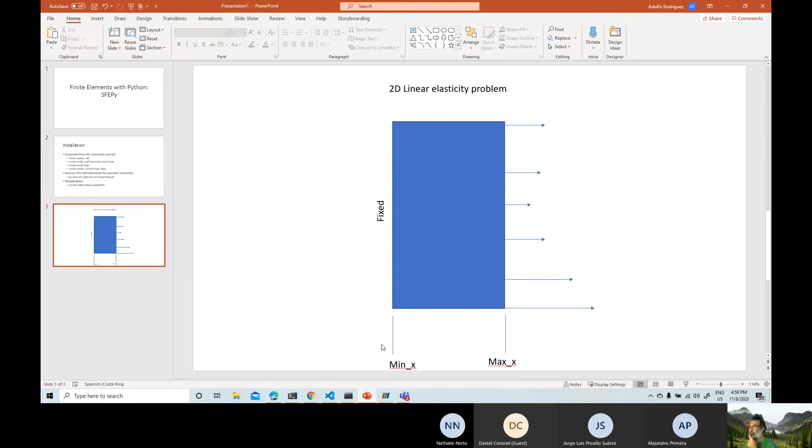They have meshing capabilities as well. So the bottom line here, and what I want to let you know, is that doing this kind of calculations, the software that you need is typically very expensive, and one of the reasons probably we haven't seen too much growth in many of these applications in petroleum is because the software is expensive and not very available to many people. But now we have the ability to use this, and this is just one of them. This is my favorite one, let's say.

But there are many other packages for finite elements in Python, which are open source. I forgot what I was doing. Examples. In the comments, I sent you a gallery.

Oh, okay. That has more visuals. At the top in the messages, just next to the participants icon. No, you were there. Okay. Just at the top of the icons. Go to the top of the icons with the microphone. Then next to the, yes, over there. Okay. Yeah. Well. Yeah.

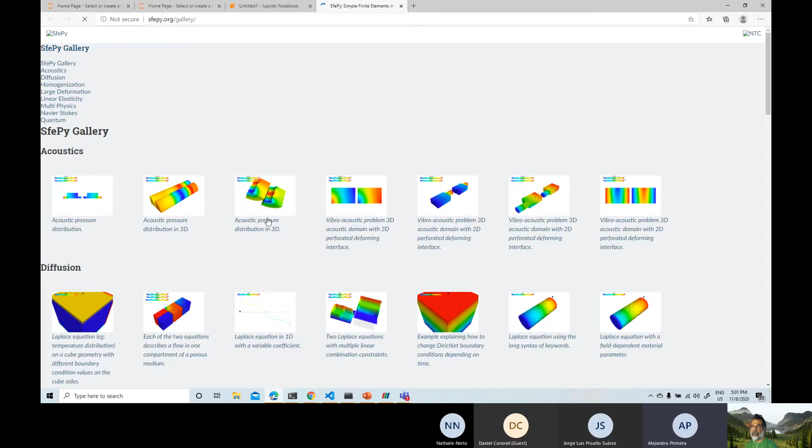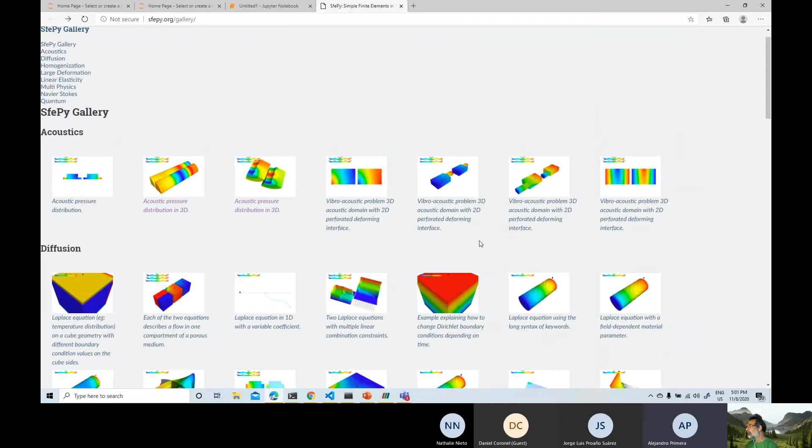So let me see if there is Navier-Stokes here. Well, for example, this kind of problem can be used for wellbore stability, or acoustics, so yeah. So it will be interesting if you have ideas. I have my own applications that I have worked on in the past, but certainly it would be interesting to see if any of you have an interesting application that we can work on.

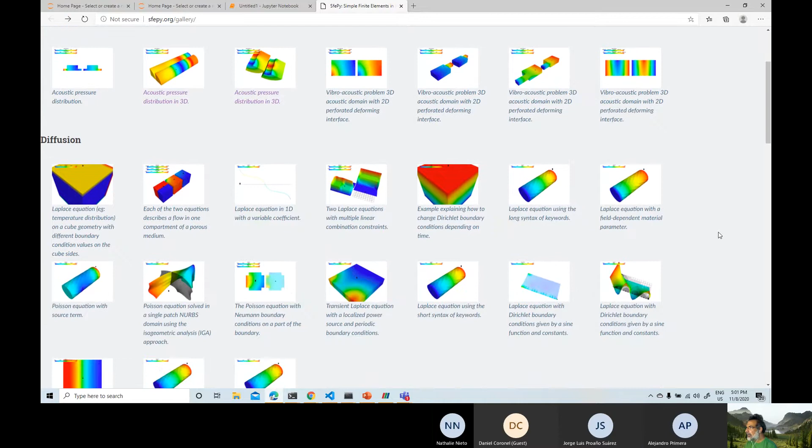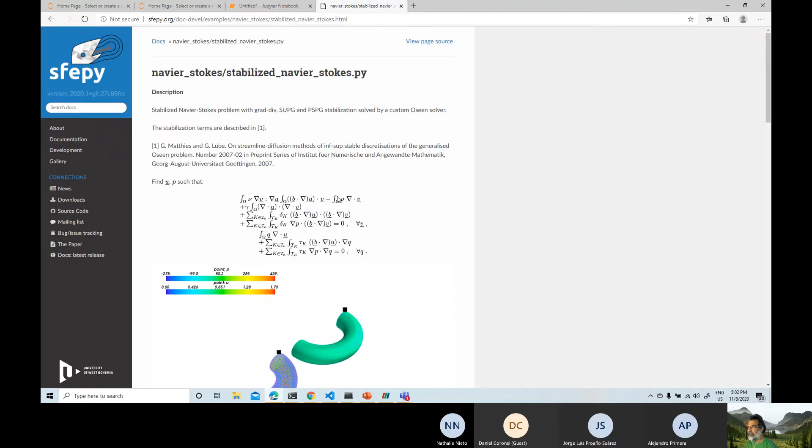Yeah, I don't see the Navier-Stokes here. Oh, there's more. Oh, Navier-Stokes. Okay, here it is. Well, this is interesting. Oh, well, there's something else. You can use this package as a black box solver. And then you can specify things in different ways. So I don't like this way.

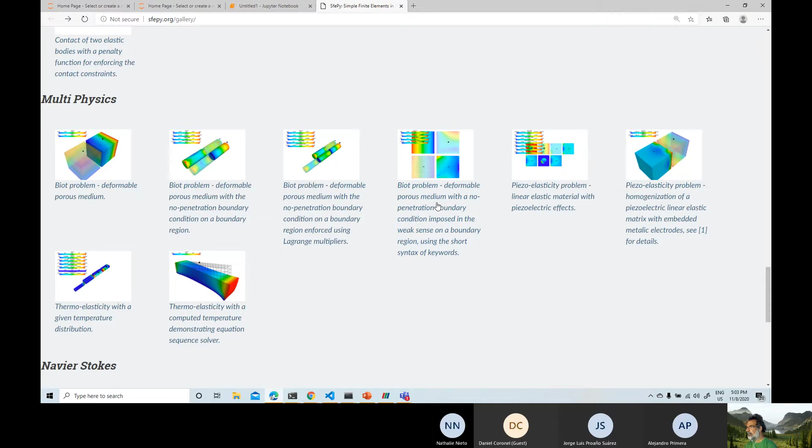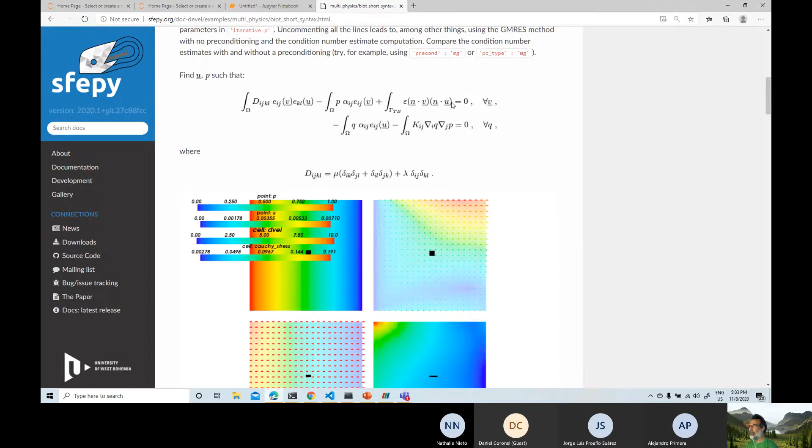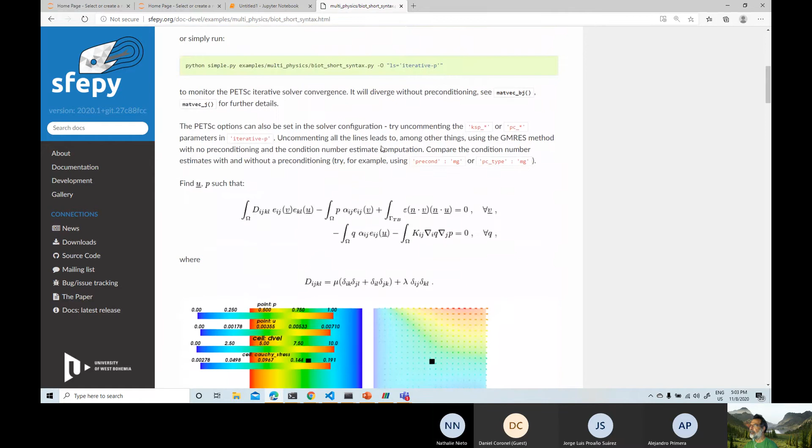Well, look at this. This is a Biot problem. So this is a coupled flow mechanics problem. I have an issue with these equations. I don't think they are correct, but I used this example for one of my papers. So this is what you can do. You have an idea for a paper. You can come here and see what kind of problems you are trying to solve, and start from there. So much better than starting from scratch. Right? Starting from scratch is going to take you years to solve one of these problems, and it's going to be just that problem.

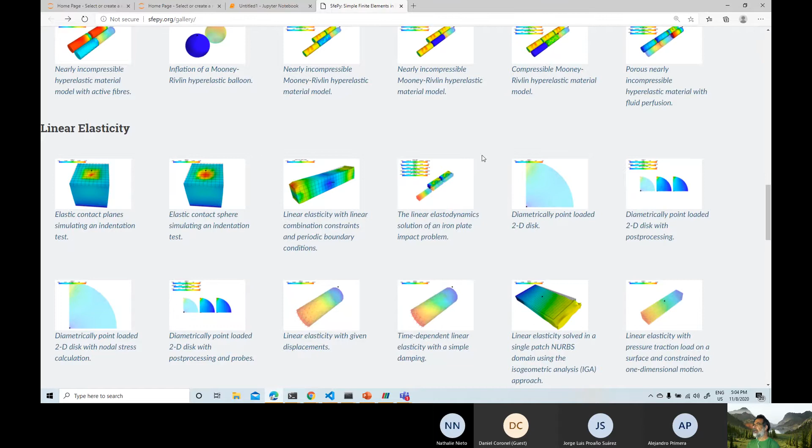So yeah, well, that's what I have today. So hopefully we can build from this and start applying it to interesting problems in the next sessions. Do you have any other question? I guess not. Well, to me, it was very good. It was enlightening. So thank you.

Okay. Welcome. I mean, I know that looking at something new may be challenging, but we have to start somewhere. Right? So what I'm showing you is that solving the problems that you saw in the gallery or the one I showed would be very, very difficult if you had to write the code yourself. So there are no limits here.

So when you open the VTK file in ParaView, where did you export the file? Yeah. I didn't quite get it. Let me see. I'm not seeing my notebook.

Did I close a notebook? In the second. Yeah. Let me open it again. I don't know why I don't see it. This is my issue with the notebooks, I always get lost with them. It's not there. It's not here. I may have closed it. Maximize. Just maximize. Right click and maximize the one that you want.

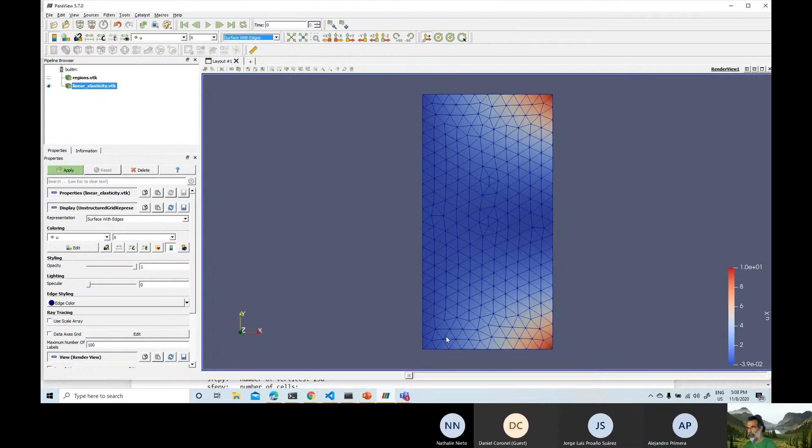So you always need to save it, even if you use the internal viewer, because you specify the file, your result. And in ParaView you cannot see the deformation? No, because this is the issue with mechanical problems. The solution of a mechanical problem is the deformation. And it's typically represented with a color or something in normal viewers.

But here they created this function within SfePy to provide that ability, which for mechanical deformation problems is much more useful, because you can have a more intuitive understanding of what's going on. If you wanted to visualize something like that in ParaView, you need to write your own. You need to apply the deformation to each node, so move each node accordingly, and then you go and visualize that.

But the problem is you don't know exactly what scale you need to apply, because the deformations are usually very small. If you apply them without the scaling, then you are not going to see much. So this is a very powerful feature here.